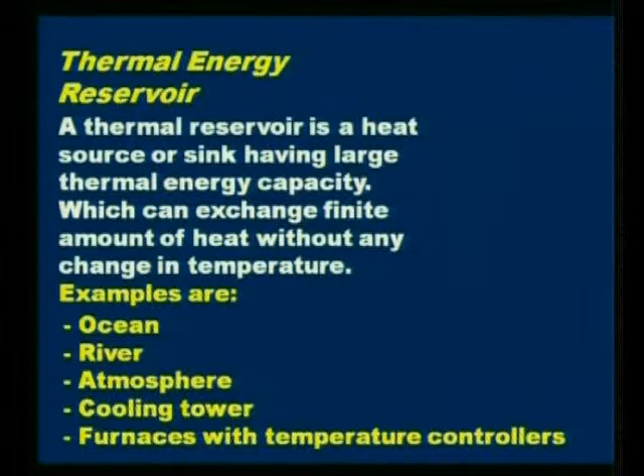We need to explain what a thermal energy reservoir is. A thermal energy reservoir is a heat source or heat sink having a very large thermal capacity, which can exchange a finite amount of energy without any change in temperature. Examples are the ocean, river, atmosphere, cooling towers, or furnaces with temperature controllers.

Let us take the example of the ocean. A large quantity of heat is rejected to the ocean, but the temperature of the ocean is not going to change, because it has a very large thermal capacity. Similarly, for rivers, a certain quantity of heat is rejected into the river, and the temperature of water is not going to change. Similarly, the temperature of atmosphere will not change if a finite quantity of heat is supplied to it.

So these are the universal thermal energy reservoirs, and they can be used as heat source or heat sink. It is necessary that the source and sink of heat should have a constant temperature, and for that these thermal reservoirs can be used as source or sink.

Then comes the heat engine. What is a heat engine? A heat engine is a device which receives heat at a higher temperature and converts a part of this heat into work, and rejects the remaining amount of heat at a lower temperature. It has been shown here.

There is a heat source which is at a higher temperature. It gives away a certain amount of heat to a device known as a heat engine. This heat engine does a certain quantity of work, and the rest of the heat is rejected to the heat sink. Say from a furnace, heat is supplied to the engine, and this engine, after doing work, rejects heat to another heat sink, which is a river or atmosphere.

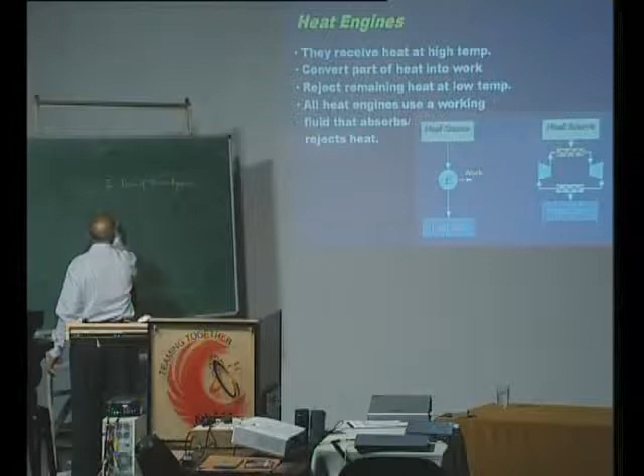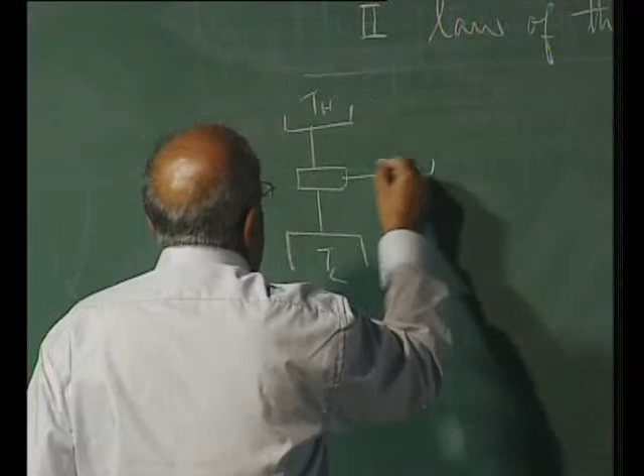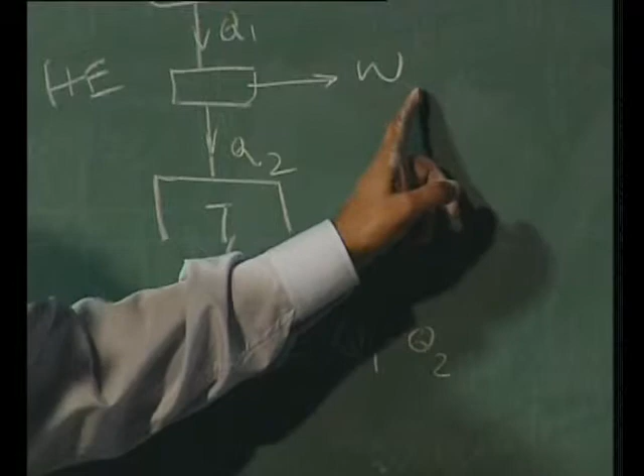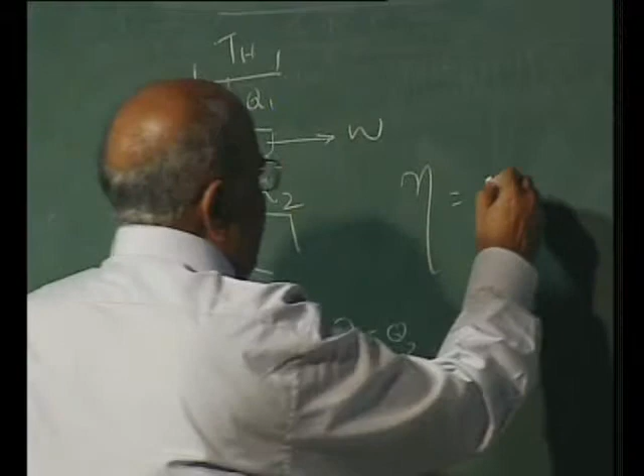Say this is the heat source at a higher temperature giving heat to the heat engine and rejecting a certain quantity of heat at a lower temperature, and a certain amount of work is being done. Work done from the first law of thermodynamics would be Q1 minus Q2. Total heat coming in minus total heat going out should be equal to work. That is the law of conservation of energy, and the total amount of work that has been done is defined by the term efficiency. Efficiency is work done divided by the energy supplied.

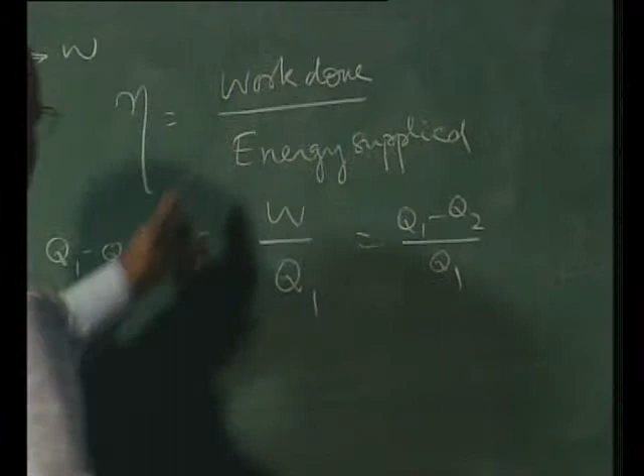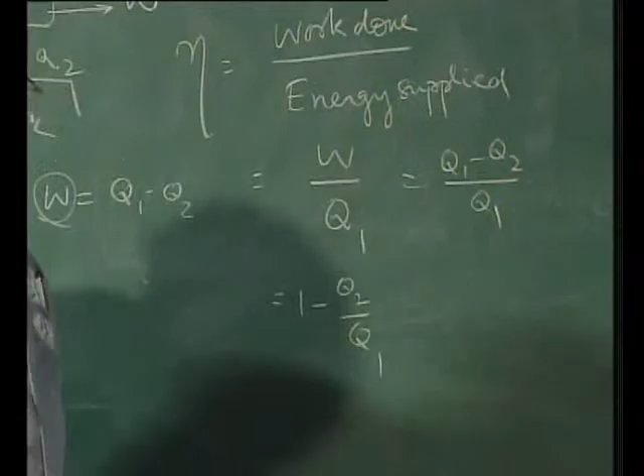W upon Q1, or Q1 minus Q2 divided by Q1. Work done has been written as Q1 minus Q2, and Q1 minus Q2 by Q1 is the efficiency, and this is 1 minus Q2 upon Q1. So, efficiency of a heat engine would be 1 minus Q2 upon Q1, and this would depend upon the temperature of the heat source and temperature of the heat sink.

As the temperature of the heat available from the sun is very low, the efficiency would be very low, whereas the temperature of the energy available from combustion of oils or gases is very high, therefore the efficiency would be much more. That is why we say that the quality of fuel, or quality of heat source, is different in the two cases.

The definition of the second law has been provided by two statements. One is the Kelvin-Planck statement and the other is the Clausius statement. The Kelvin statement says that it is impossible to construct a device which will operate in a thermodynamic cycle and produce no effect other than raising of a weight and exchange of heat with a single heat reservoir.

So, this particular arrangement is not possible. If this arrangement would have been possible, the efficiency would have been 100%, because whatever amount of heat is supplied is converted into work, and therefore the efficiency is 100%. This is impossible. So, the Kelvin-Planck statement says that it is impossible to have a heat engine which has an efficiency of 100%, and therefore, what is possible?

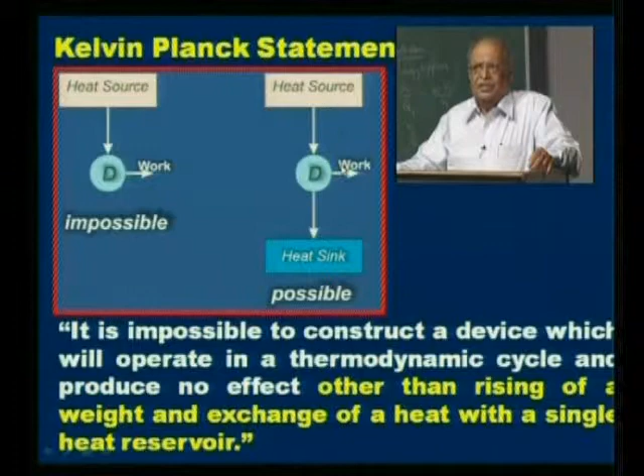What is the possibility? For the heat engine to be possible, we have to reject some of the heat to the heat sink. Heat is drawn from the heat source, some of it can be converted into work, all of it cannot be converted into work, some of it can be converted into work, and the rest of it has to be rejected, and then only the system will work.

The heat energy can be converted into work only if there is a heat sink. Without a heat sink, that means without two heat reservoirs, the engine will not work, the work cannot be done, and the efficiency will always have to be less than 100%. So that is the Kelvin-Planck statement, and this statement defines the quality of energy.

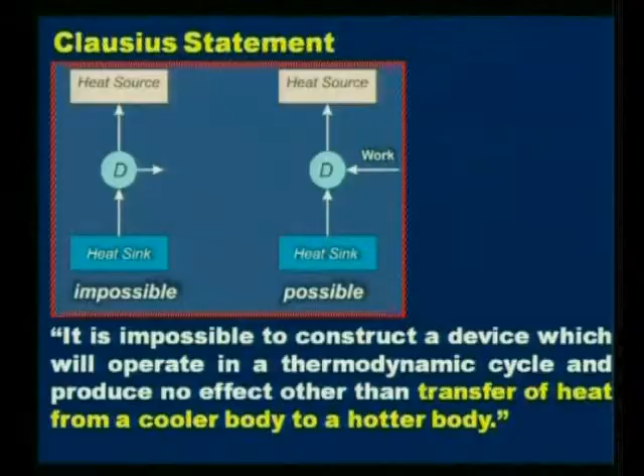The other statement is the Clausius statement. The Clausius statement says that it is impossible to construct a device which will operate in a thermodynamic cycle and produce no effect other than transfer of heat from a cooler body to a hotter body.

This shows that there is a cyclic device, and it is impossible to construct this device which will draw heat from a low temperature heat reservoir and deliver it to the high temperature heat reservoir. This is impossible. You cannot have a device like this.

This device is impossible, and if this is to be done, what is necessary? If heat is to be transferred from a low temperature heat reservoir to a high temperature heat reservoir, this device has to consume certain energy from an external source. Work has to be supplied to this device so that heat can be drawn from the low temperature heat source and rejected to the high temperature heat reservoir.

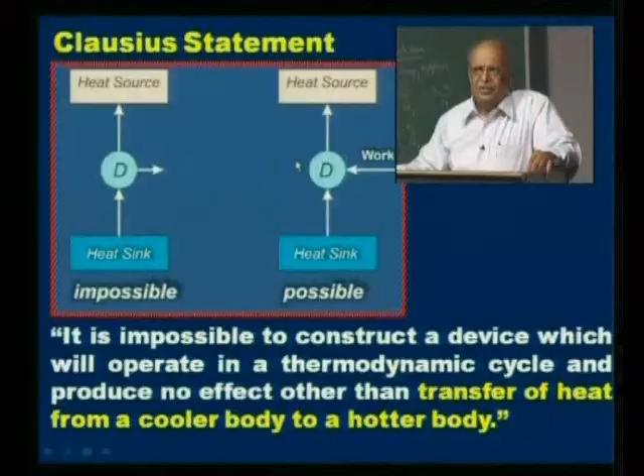This forms the basis for all air conditioners and refrigerators. In refrigerators and air conditioners, heat is drawn at a lower temperature and rejected to the atmosphere, which is at a higher temperature than the refrigerator or air conditioner. So this is the law which gives direction to the energy flow.

So there are two statements: the Kelvin-Planck statement, which defines the quality, and the Clausius statement, which gives direction to the process to take place. Now these two statements are negative statements. Both of them say that it is impossible to do something.

It is impossible to construct a device that will draw heat from a heat reservoir and convert it entirely into work, or it says that it is impossible to construct a device which will draw heat from a low temperature heat reservoir and give it to a higher temperature heat reservoir.

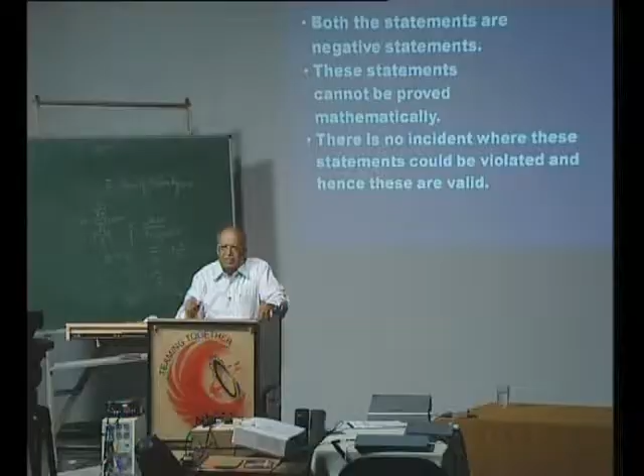Both these statements are negative statements, and as these statements are negative, they cannot be proved mathematically. There is no mathematical proof that exists to prove these two laws, but at the same time there is no single instance found in the history of the universe where these statements could be violated, and once these statements cannot be violated, they are valid statements, and this has been proved subsequently.

The two statements are equivalent also. Any device that violates one of these statements also violates the other, and this can be proved as follows: violation of the Clausius statement is violation of the Kelvin-Planck statement also. It has been shown here.

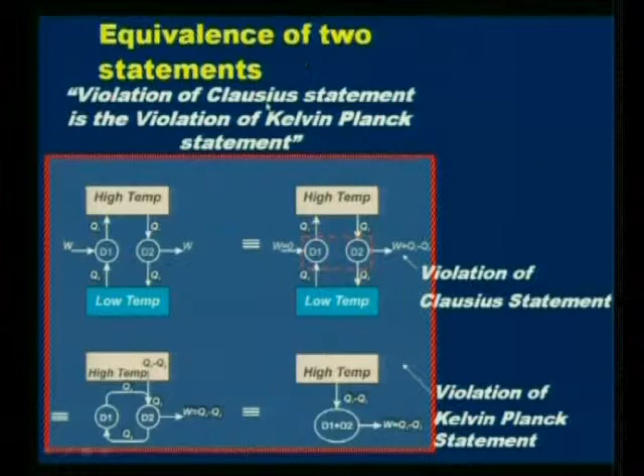Let us assume that the Clausius statement is violated. There is a device D1 which violates the Clausius statement, and a device D2 which follows or obeys the Kelvin-Planck statement. If D1 is violating the Clausius statement, it will draw a certain quantity of heat and, without absorbing energy, reject this heat at a higher temperature. D2 will draw a certain amount of heat from the high temperature reservoir, do a certain amount of work, and reject the remaining heat.

Now these two devices operate between the same two heat reservoirs as shown here, and since both operate between the same two reservoirs, let us couple these two devices together. If these two devices are coupled, we can say that a certain quantity of heat is taken, a certain quantity is rejected, and a certain quantity of work is done, which is okay as per the Kelvin statement.

Whatever amount of heat is rejected here, the same amount of heat is drawn from the other device, and once this quantity of heat is taken and rejected to the high temperature heat reservoir, and once we are rejecting a certain quantity of heat here and an equal quantity is absorbed here, the net amount of heat exchange from the low temperature heat reservoir is zero.

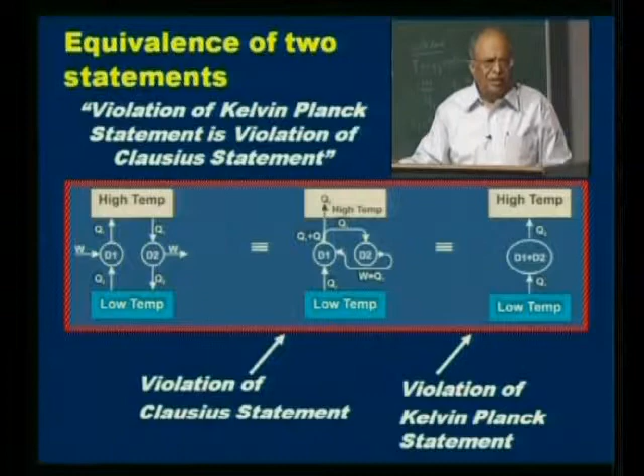So this is the second law of thermodynamics, and this second law of thermodynamics then takes care of the drawbacks or limitations of the first law of thermodynamics.

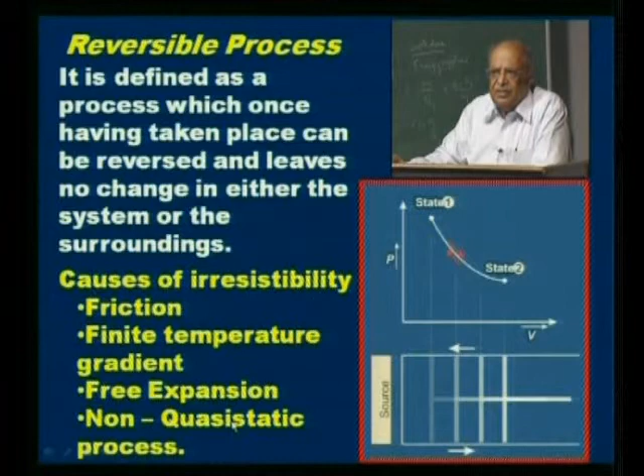There are processes which are irreversible processes, and a process becomes irreversible because of friction, because of a finite temperature gradient when heat is supplied and rejected. If there is a free expansion, or if the process is a non-quasi-static process, then the process will not be a reversible process; otherwise the process would be reversible.

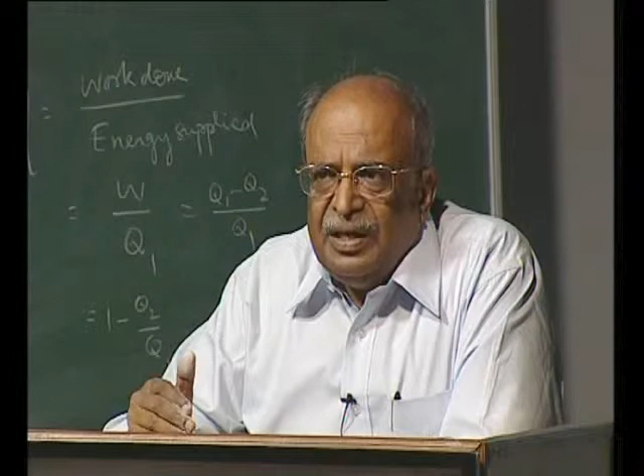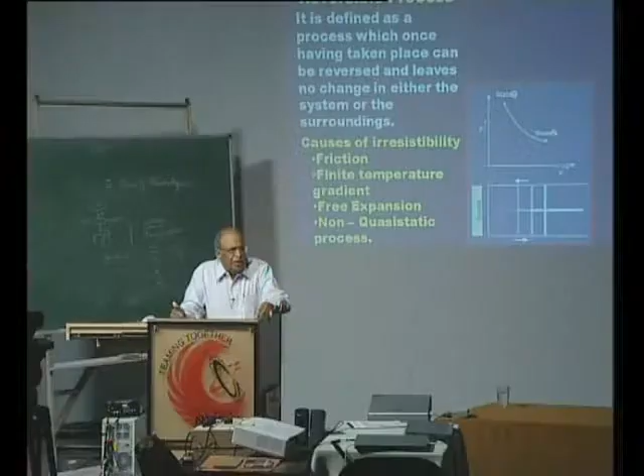This is very important from the point of view of thermodynamic analysis. We must know if the process is reversible or irreversible, because an irreversible process consists of many losses which we will have to take care of, whereas reversible processes do not have those losses, and therefore they are ideal processes.

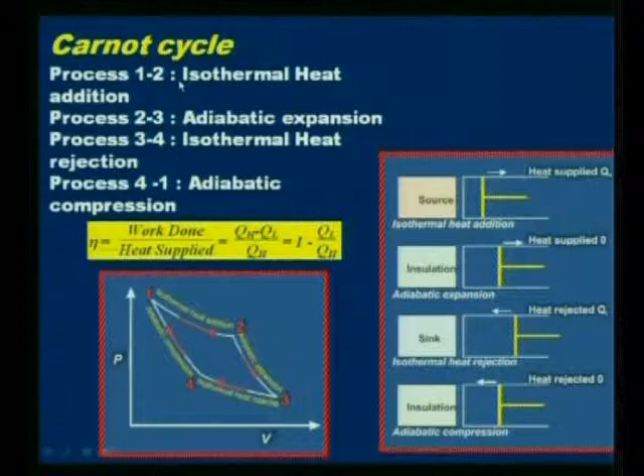Now we proceed to the next part of the lecture, the Carnot cycle. A Carnot cycle consists of 4 reversible processes, and it is considered to be the most efficient thermodynamic cycle. A Carnot cycle has been shown here. It consists of 4 processes: process 1-2, an isothermal heat addition process; process 2-3, an adiabatic expansion process; process 3-4, an isothermal heat rejection process; and process 4-1, an adiabatic compression process.

As shown here, 1-2 is isothermal heat addition, 2-3 is adiabatic expansion, 3-4 is isothermal heat rejection, and 4-1 is adiabatic compression. The processes have been shown in an actual device here. Say this is a piston and cylinder arrangement which contains a certain working fluid, a gas such as air, in this system as shown here, and this system is at a particular temperature.

A source is brought at the same temperature as the gas, and heat is supplied at constant temperature to the gas. Once the gas expands, there would be an infinitesimally small drop in temperature, and because of that drop in temperature, heat will flow from the source into the gas, and the gas would start expanding.

It expands up to this point as shown here, and once it has moved isothermally from point 1 to point 2, at this point the heat source is removed and the cylinder head is insulated. The whole system is insulated from the external media, so no heat can enter, but because of the temperature, the expansion continues till it reaches the outer dead center position.

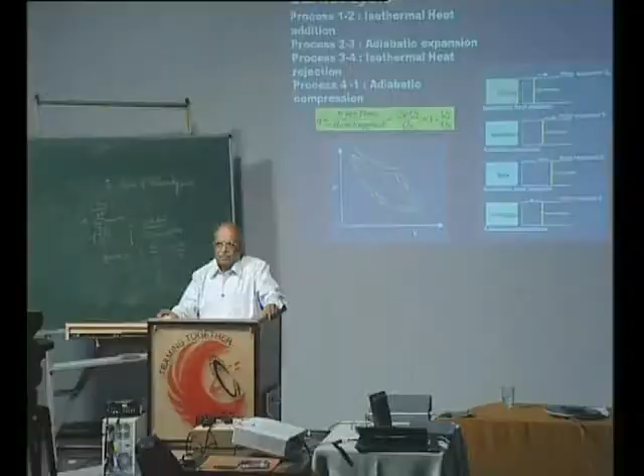From the principle of energy conservation, the total work done would be QH minus QL, and the efficiency would be the work done divided by heat supplied: QH minus QL upon QH, that is 1 minus QL upon QH. This is the efficiency of a Carnot cycle, and this is the maximum efficiency that a device can have in thermodynamics.

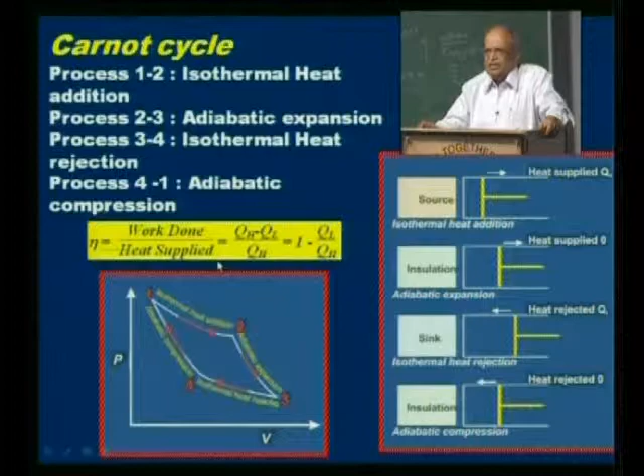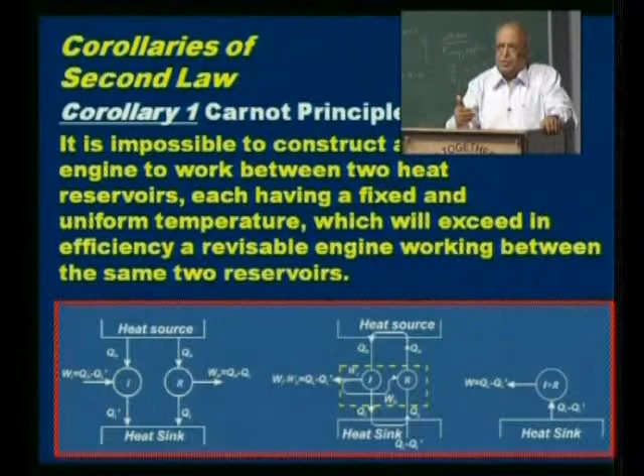So now we come to corollaries of the second law, and the first corollary is the Carnot principle. The Carnot principle states it is impossible to construct an engine to work between two heat reservoirs, each having a fixed and uniform temperature, which will exceed in efficiency a reversible engine working between the same two heat reservoirs. In simple words, it is impossible to have an irreversible engine with efficiency more than a reversible engine working between the same two heat reservoirs.

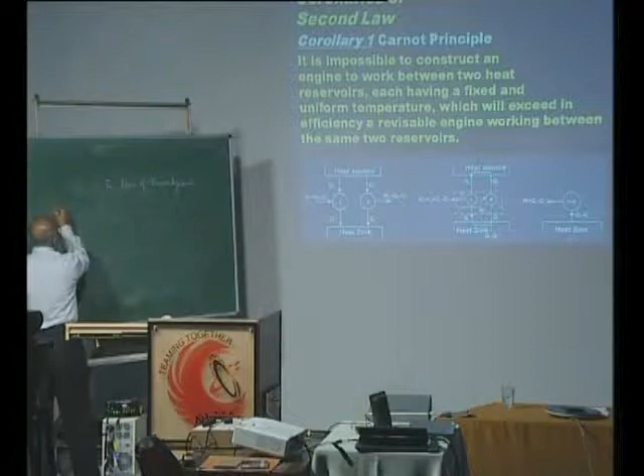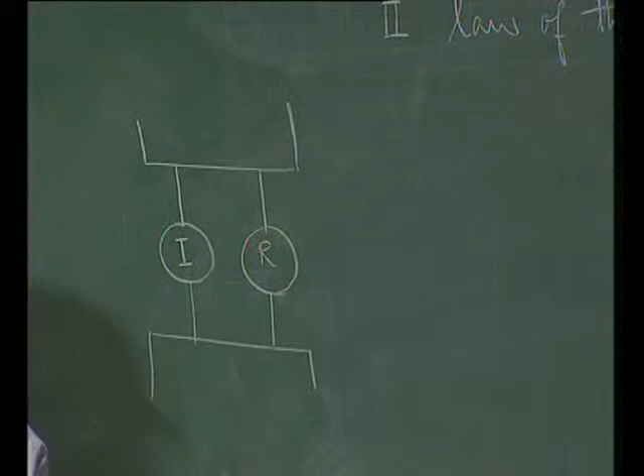Let me explain. Suppose there are two heat reservoirs, a high temperature and a low temperature reservoir, and there are two devices: one is an irreversible device and the other is a reversible device, working in thermodynamic cycles. Both of them are supplied with a certain quantity of heat, QH here and QH here.

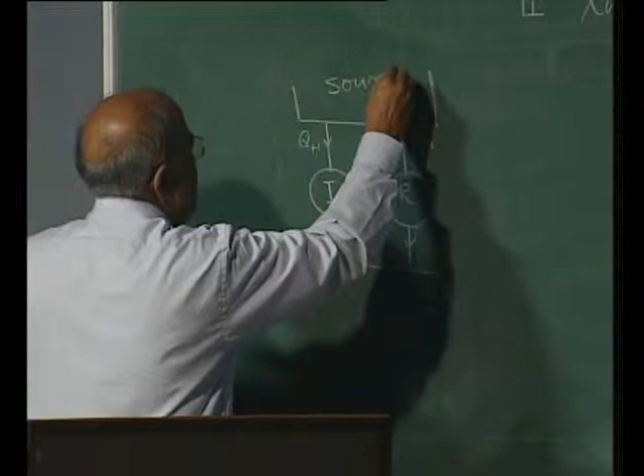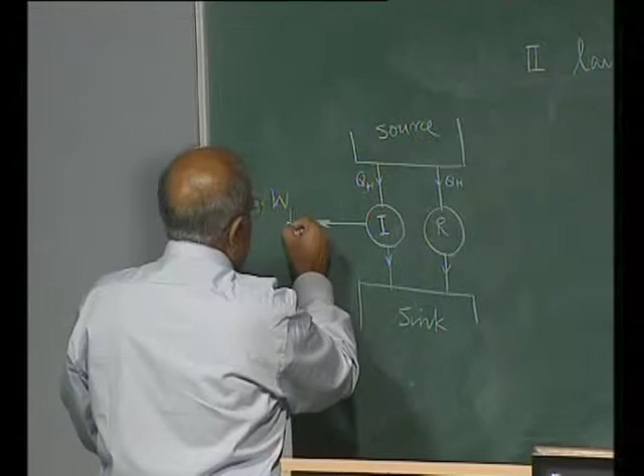They would reject a certain amount of heat to the low temperature heat sink. This is the source and this is the sink. Some of the energy would be converted into work, and this we call work irreversible, while this device would convert a certain amount of heat into what is known as work reversible.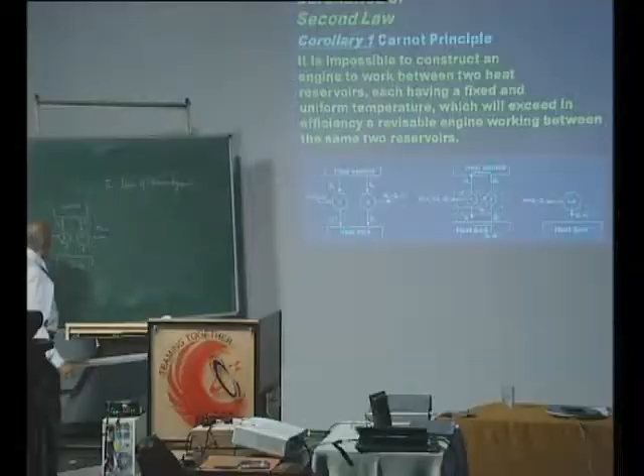The corollary says that it is impossible that the efficiency of I would be greater than the efficiency of R. Let us assume the efficiency of I is more than the efficiency of R. If the efficiency of I is more than the efficiency of R, the work done by this engine would be more than the work of a reversible engine.

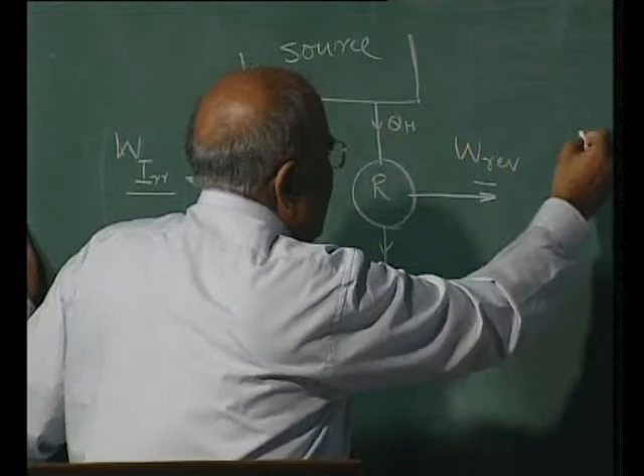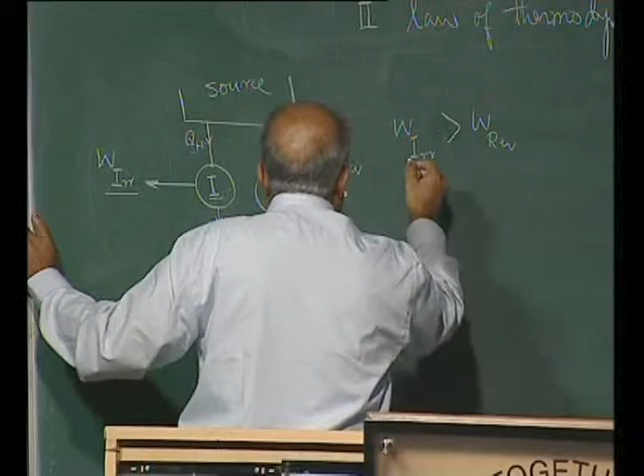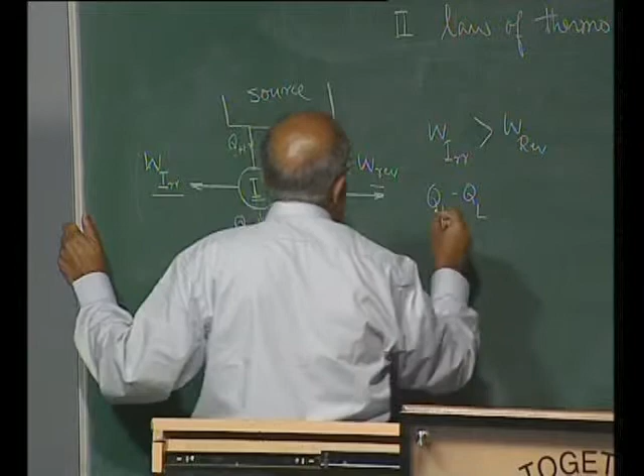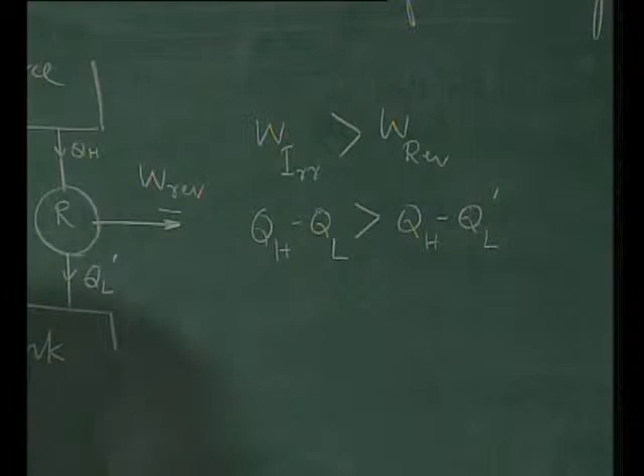And what is work irreversible? It is QH minus QL greater than QH minus QL dash. Now, if the efficiency of this engine is more, this quantity would be more than that quantity, and QL would be less than QL dash.

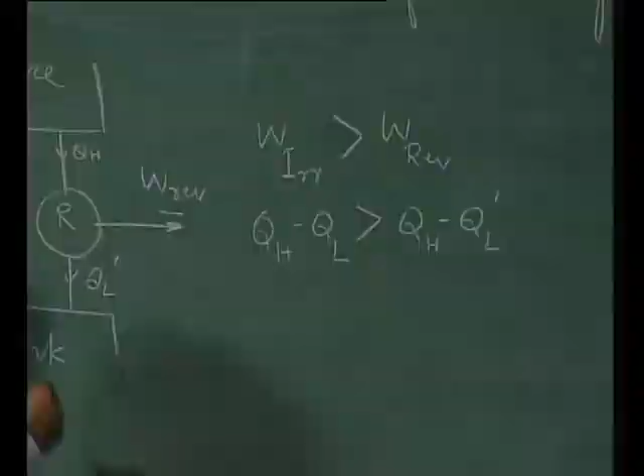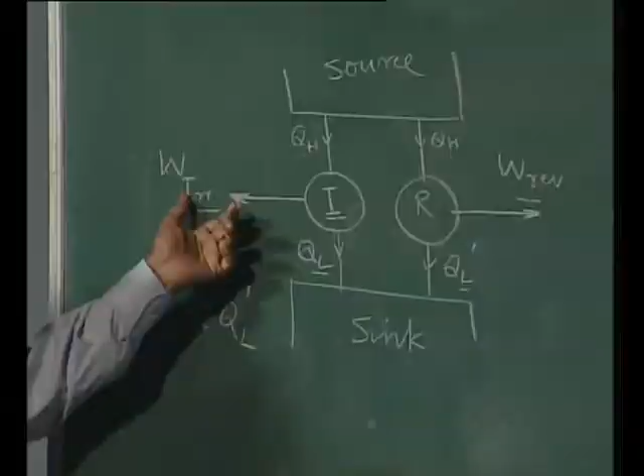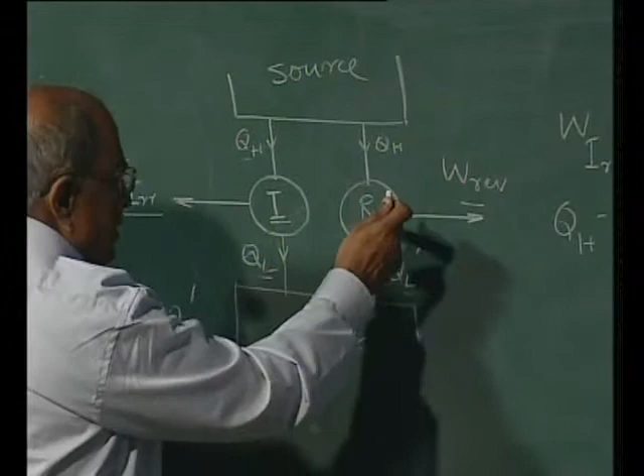Definitely, because it is converting more heat into work, the heat rejected would be less than the heat rejected by this engine. And once this engine is rejecting less heat, since this engine is a reversible engine, it can be reversed in direction. If this engine is reversed in direction, what will happen?

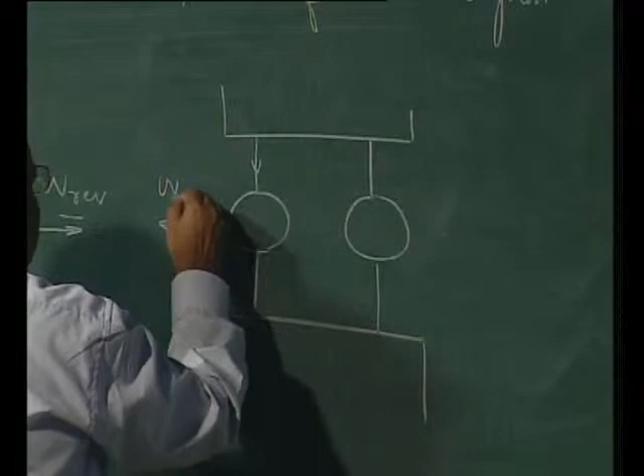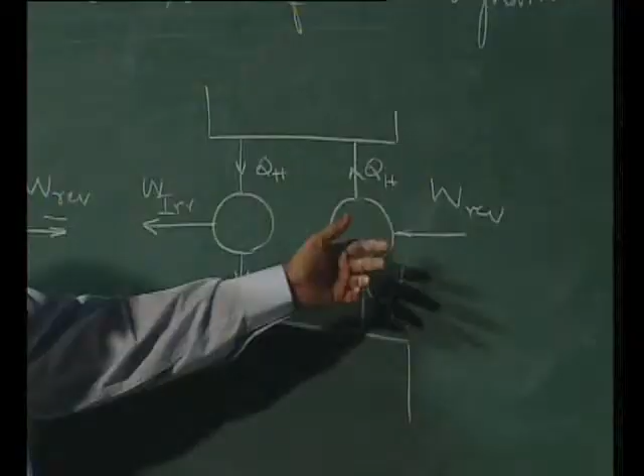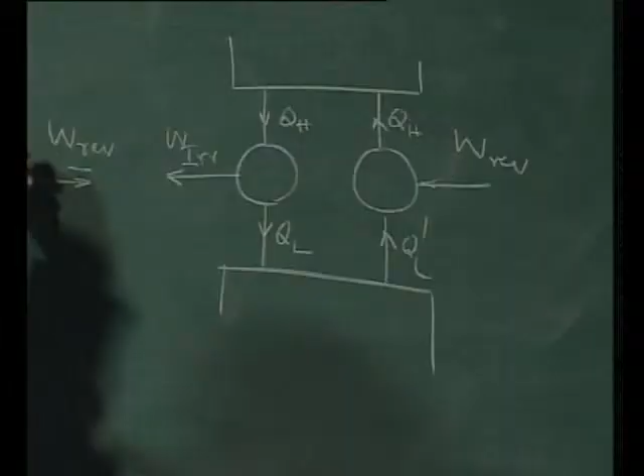A reversible engine can be reversed in direction, as we have discussed in reversible processes. Once it is reversed, instead of giving work here, an equal amount of work will be consumed by this. This will draw heat equal to QL dash and reject heat equal to QH, because this is a reversible engine, this is possible.

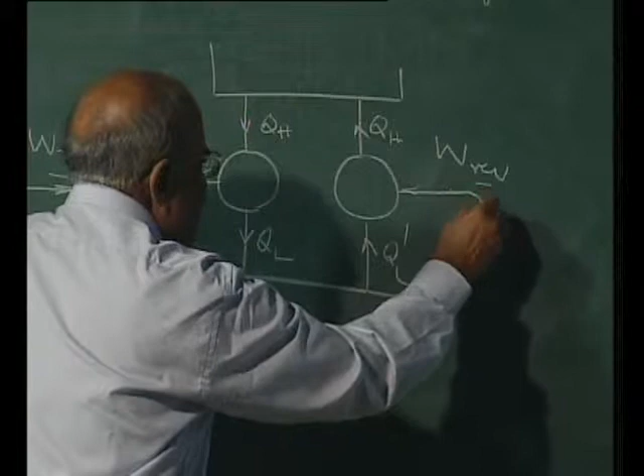And if this happens, since work irreversible is more than work reversible, this amount of work can be obtained from this.

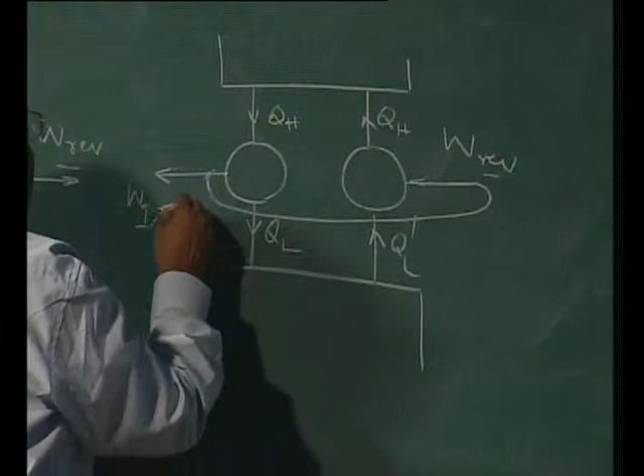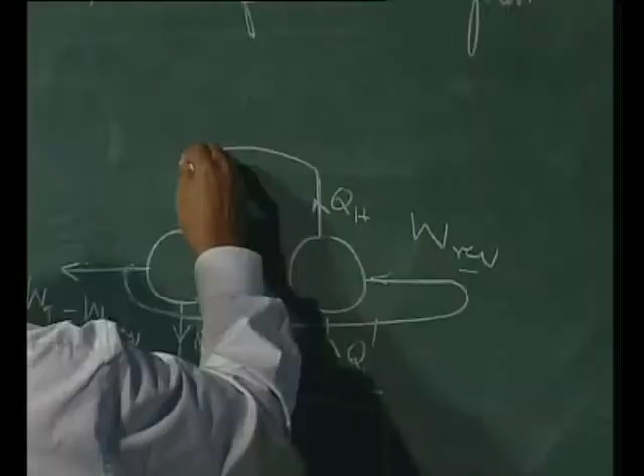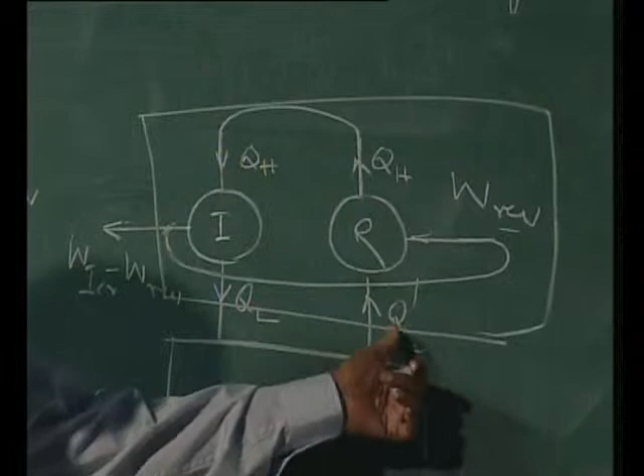This is work reversible, and the net output would be work irreversible minus work reversible. Now this amount of heat is equal, and therefore there is no need of a heat source here. Whatever heat is rejected would be used to drive this irreversible device. This whole combination becomes like it is drawing a certain amount of heat, QL dash minus QL.

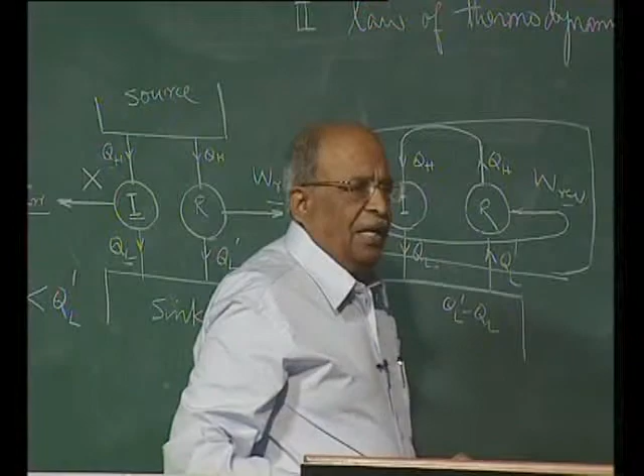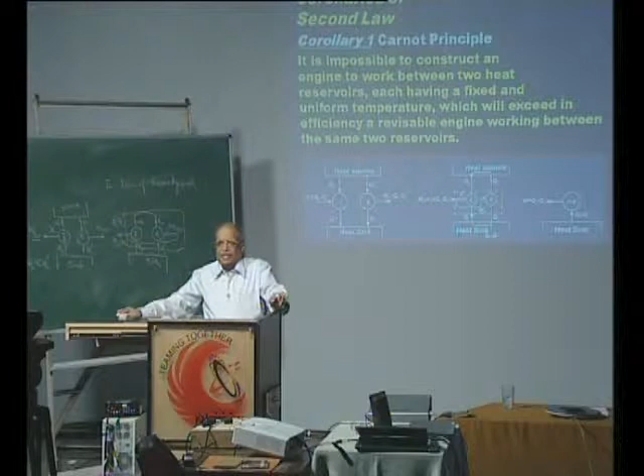from a single heat reservoir and doing some amount of work equal to QL dash minus QL. This violates the Kelvin Planck statement, since it is drawing heat from a single heat reservoir and doing certain amount of work. So the assumption that the efficiency of this engine could be greater than this engine is not valid, and therefore corollary 1 is true: the efficiency of an irreversible engine can never be more than the efficiency of a reversible engine if the two are working between the same temperature limits.

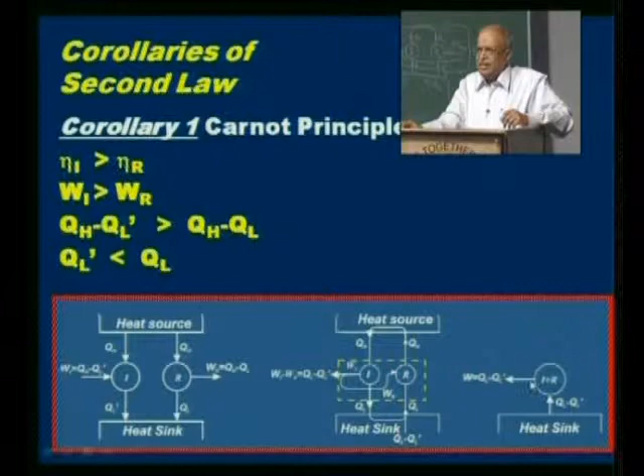So that is corollary 1. This is shown here: heat is drawn, QL minus QL dash, to a single device, and it is doing a certain amount of work, as shown here. Then we come to corollary 2, which says that the efficiencies of all reversible engines operating between the same heat reservoirs are the same.

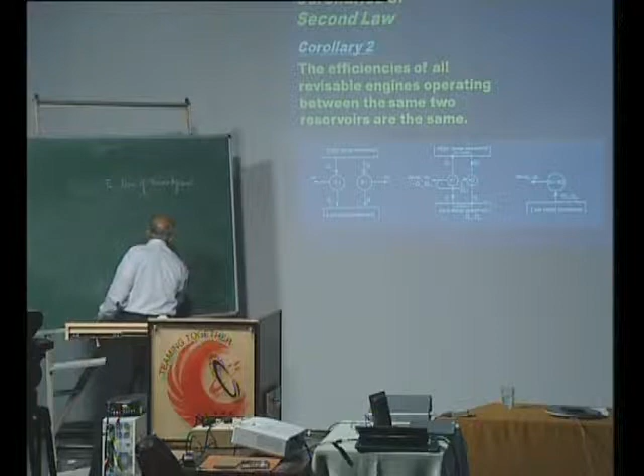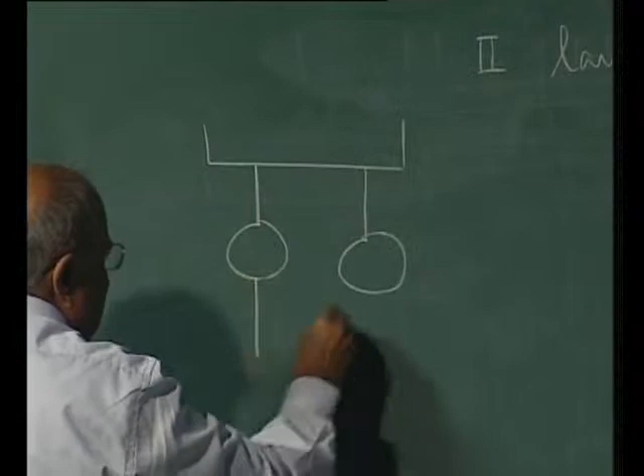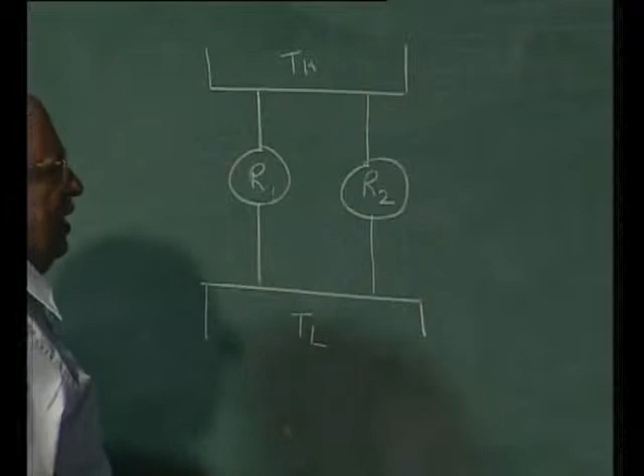This is reversible device R1, this is reversible device R2. These two devices are working between the same two heat reservoirs at temperatures TH and TL, and these two heat engines, when working between these two heat reservoirs, have different efficiencies. Let us assume efficiency of R1 is greater than efficiency of R2.

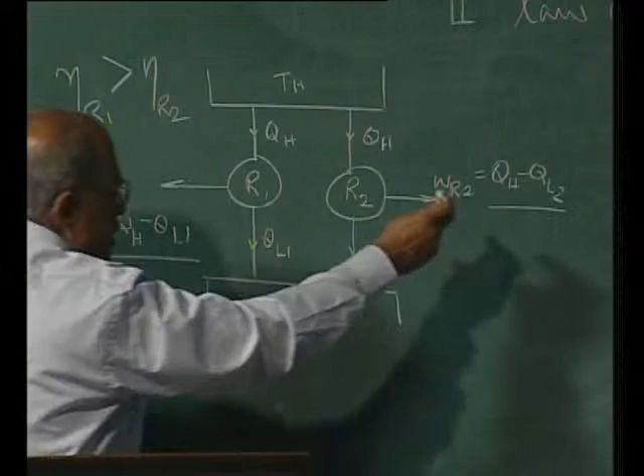The work done by this would be QH minus QL1, and work done by this engine would be QH minus QL2. Since the efficiency of this engine is more, this quantity of work would be more than the other. The heat rejected by this engine would be less than the quantity of heat rejected by the other.

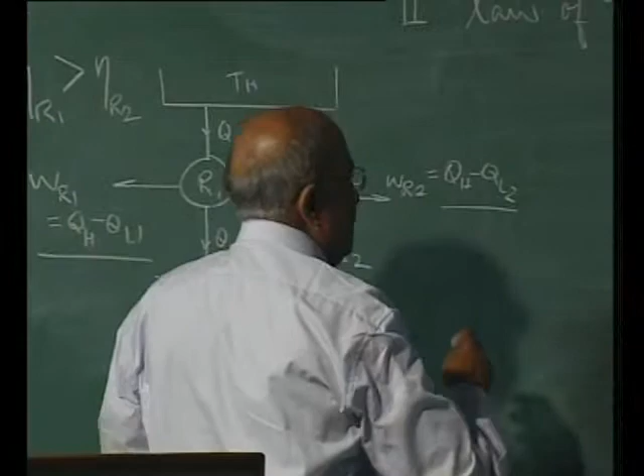Now again, by the same logic, let us reverse this engine, and if this engine is reversed, the system would become as shown here. The efficiencies, the engines are reversed. This engine, if reversed, will draw heat here and reject heat here, and the work required by this engine would be drawn from the other reversible engine.

Part of the work output would be used to drive this heat engine now that has been reversed, and therefore the combination of the two engines would be R1 plus R2, as we have done in the earlier case, and they will draw a certain amount of heat, QL2 minus QL1, with the amount of work output equal to QL2 minus QL1.

Again this violates the Kelvin Planck statement, and therefore the assumption that the efficiency of one engine would be greater than the efficiency of the other is not correct. Therefore, the efficiency of all reversible engines operating between the same two heat reservoirs will always be the same. So it is the temperature of the two heat reservoirs that is mainly responsible for the efficiency of the engine, and not the device itself.

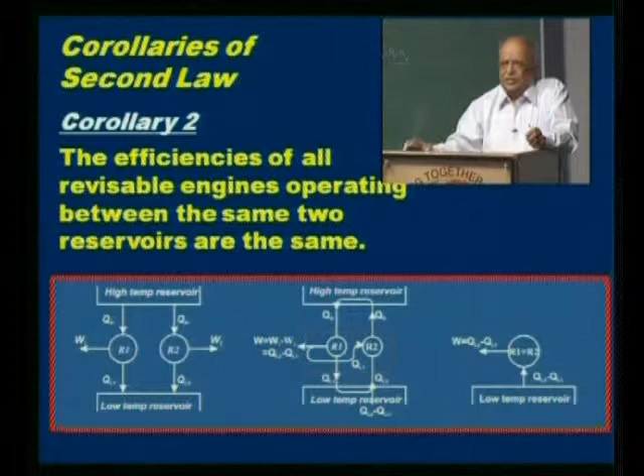Then the third corollary says that the efficiency of all reversible engines operating between the same two heat reservoirs is independent of the nature of the working fluid, and depends only on the temperature of the heat reservoirs.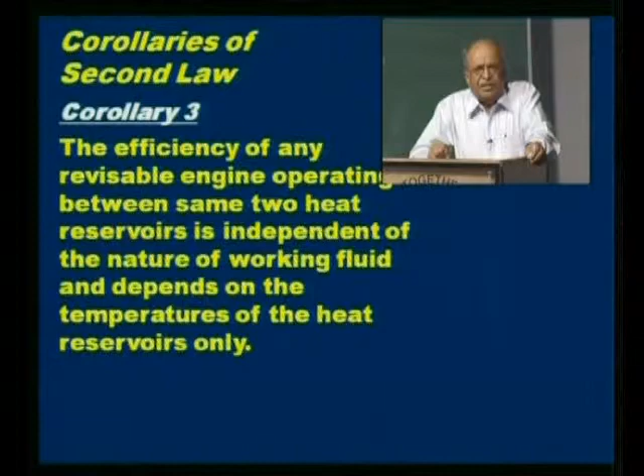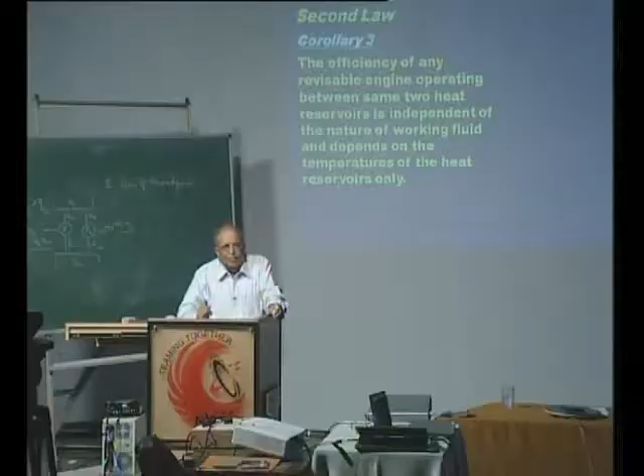We have just discussed the two corollaries, and the logic would be the same to prove the third corollary also. The efficiency of the device would depend upon the temperature of the heat source and heat sink only, and not the working substance. Suppose one engine is working with water as working fluid and the other with air, it will not matter. The efficiencies would be the same as long as the temperatures of the two heat reservoirs are the same.

Then comes the next corollary, the thermodynamic temperature scale. It is one of the most important deductions of the second law of thermodynamics, and it says that a temperature scale may be defined which is independent of the nature of the thermometric substance. That is a corollary of the second law of thermodynamics.

Earlier, the zeroth law of thermodynamics was discussed, and it was said that thermal equilibrium can be used to define a system which would enable us to measure temperature using a thermometer. But that temperature measured with the help of the zeroth law depends on the thermometric substance, whether we use Celsius scale or Fahrenheit scale, mercury thermometer or alcohol thermometer.

In thermodynamics, what is needed is that the temperature scale should be independent of the nature of the thermometric substance, and for that we have just stated a corollary which says that the efficiency of a reversible engine is independent of the nature of the thermometric working fluid.

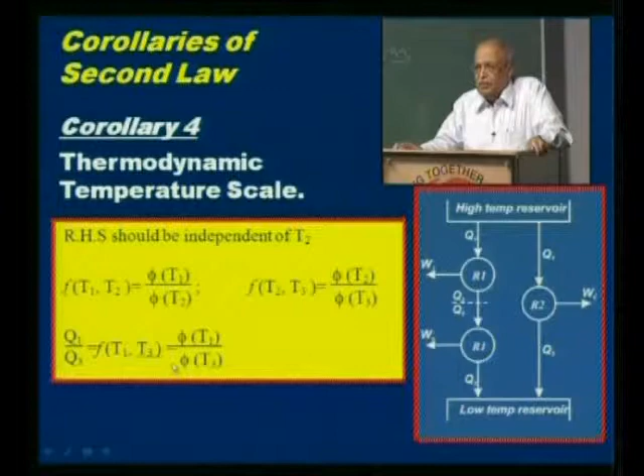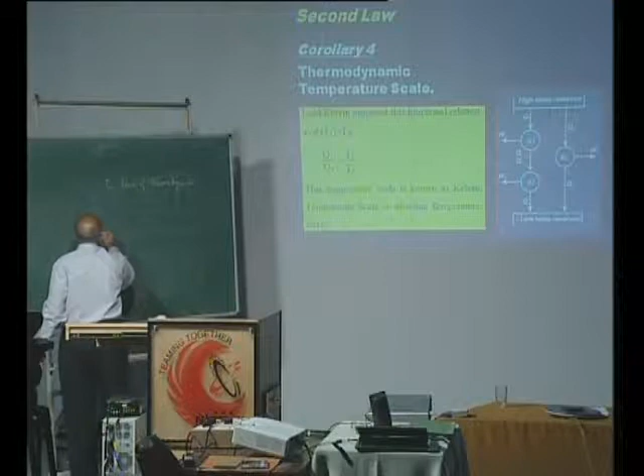Q1 by Q3 would be equal to a function of T1 and T3, and Lord Kelvin then proposed a functional relation between Q1 by Q3. He said that this Q1 by Q3 should be equal to phi T1 by phi T3, and this functional relationship proposed by Lord Kelvin is that they should be equal to T1 by T3.

This linear relationship was proposed by Lord Kelvin, and this is known as the thermodynamic temperature scale, or absolute temperature scale, or Kelvin temperature scale after his name, and this gives us a basis for measurement of temperature in thermodynamics. This thermodynamic temperature is a property of the system.

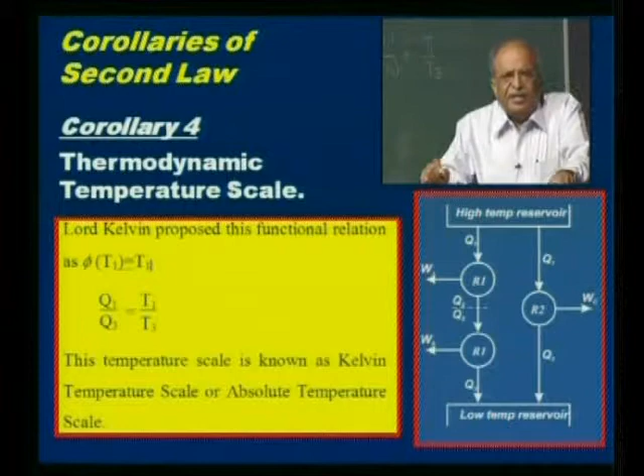Degree Fahrenheit or degree centigrade is not a property of a system or substance, whereas this temperature is a property of the substance. If we want to measure temperature with the help of this temperature scale, we do not have to use a thermometer, but it is not possible to carry a Carnot engine or reversible engine for measurement of temperature in practice.

Therefore we have to have a simple device for measurement of temperature, and for that a conference on weights and measures was held in Geneva in 1954, and there it was proposed that the temperature of the triple point of water

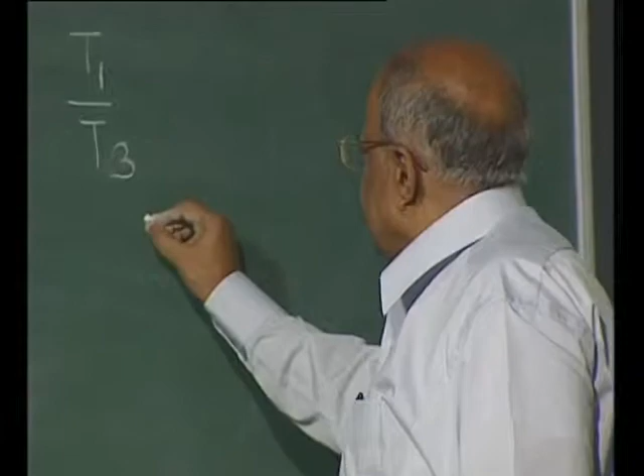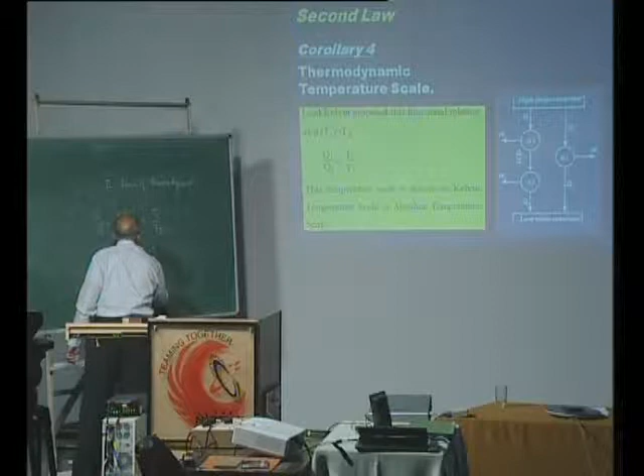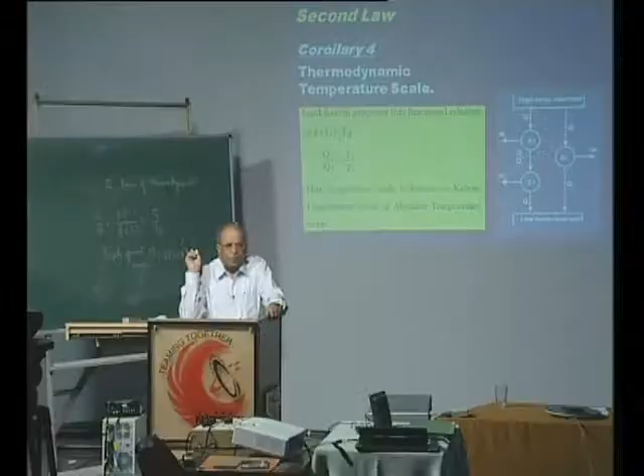was assigned a value of 273.16 on the Kelvin scale, and this difference between absolute zero and the triple point of water was divided into 273.16 divisions, and that gives us the reading on a thermometric scale.

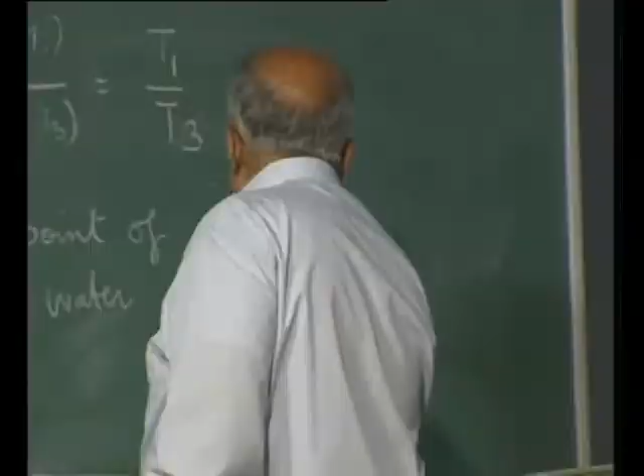Absolute zero and 273 divided into 273.16 divisions gives us 1 Kelvin, the measure of temperature, and this 1 Kelvin is equal to 1 degree centigrade on a thermometer. Whatever type of thermometer we may use, 1 degree centigrade is taken as 1 Kelvin. On the Kelvin scale, absolute zero is there, and the triple point of water has been assigned a value of 273.16, and accordingly the temperature scale available to us is known as the Kelvin temperature scale.

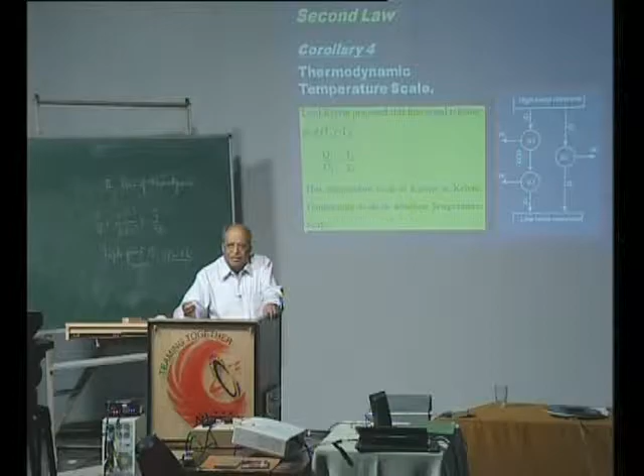Now we would proceed with the next topics in the subsequent lectures on entropy, availability and other topics of thermodynamics.